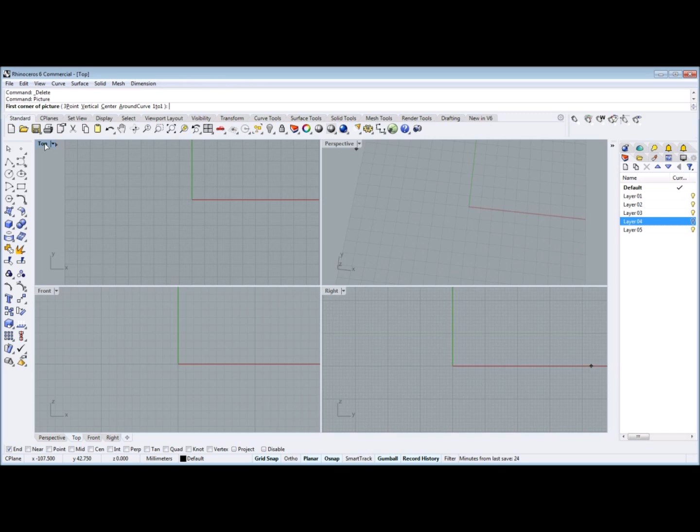Notice how we have crosshairs here, and I'm going to put it into the top view screen. We just drag it in and place the second corner by clicking on that corner. The scale really isn't important at this point, and you'll see why in a minute.

The next thing we will do is use a control point curve up here, the upper left, and I'm going to take off grid snap in this case to get more precise placement of my control points as I try and get as close as possible to the edge all the way around this gem, making control points anywhere between 2 and 3 millimeters, and 5 and 10 millimeters apart.

We can go around this pretty quickly. It's not imperative that we get it perfect at this point. We move around our gemstone, putting our control points a little closer as we get around sharper corners, and then we can move faster and place them farther away as we get onto more flat parts of the outline of the stone.

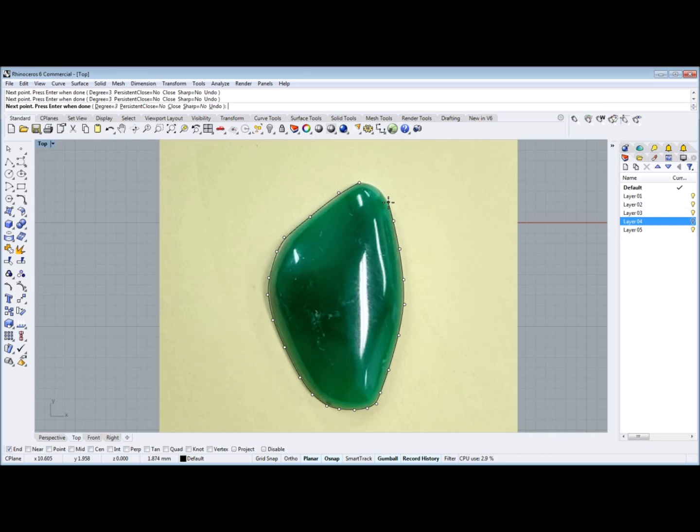I'm going to bring this in pretty close here to put these last couple of control points in. Boom. It's not imperative that they're perfect at this point, because as you can see now, as we highlight the curve, control points show up in Rhino 6, and we can begin manipulating these control points.

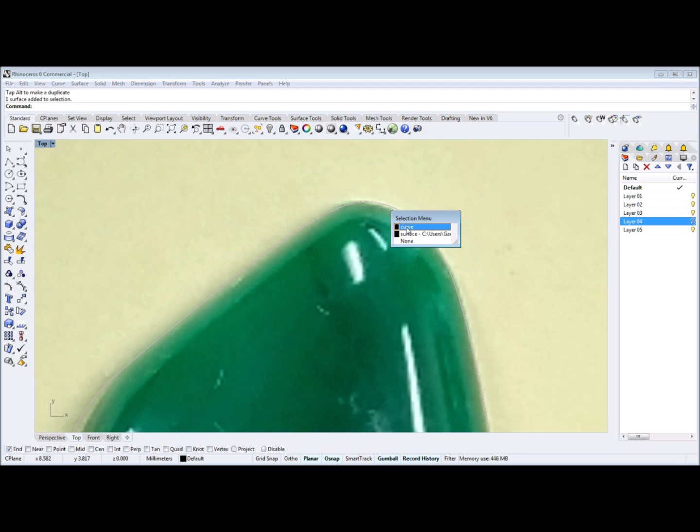We can use the arrows, the gumball handles to do that. We can use the center of the gumball, but we'll see here in a minute.

Let's find another one that needs some editing. Okay, curve over here. In this case, I'm going to shift select, which selects both of these control points, and I'm going to use the window pane.

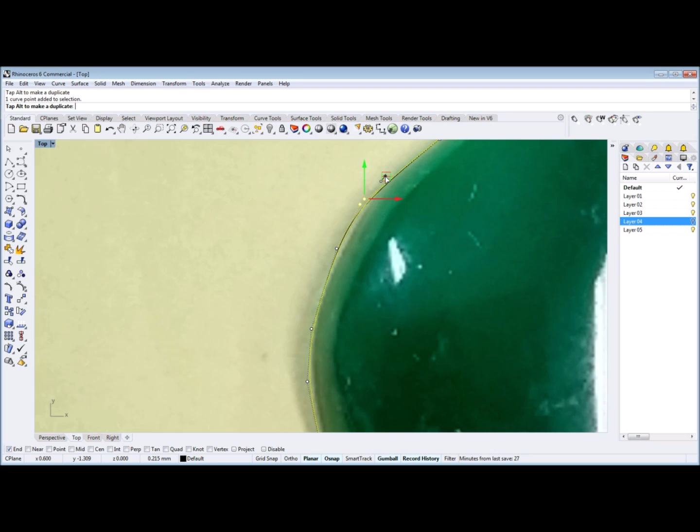Looks like I shouldn't have maybe selected both of them, because this one in particular needs a little different help. There we go. The window pane moves really freely around whatever viewport that you're in, and I find it really great for control point editing.

We're in pretty good shape here the rest of the way around this gem. I'm going to call that happy. So now we select our picture. It's a good idea, we may need this again, so we're going to save it.

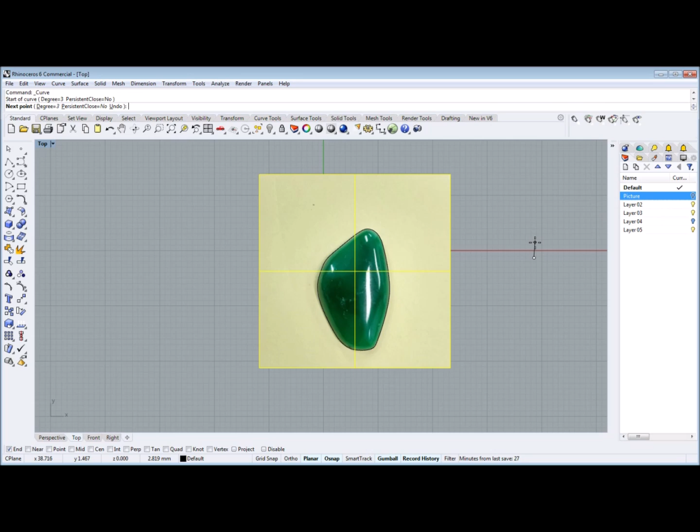We're going to create a layer, name it picture, and we'll put this on the picture layer, then hide that layer so we can bring it back later. Oops, what happened here? That should go on the picture layer. What just happened? There we go, got it hidden finally.

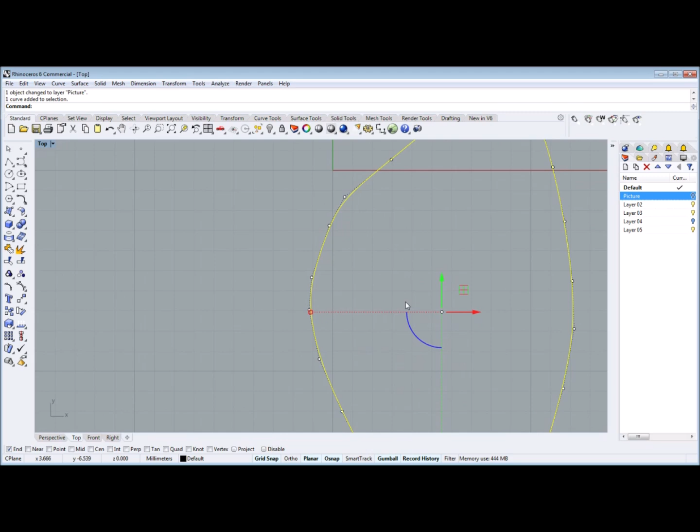Now, the next thing we're going to do is bring this to 0,0. We're going to center this as best we can by using gumball center with grid snap. We're going to come in a little closer here, and we're going to get this centered, then scale it from this central part of the viewport.

Now, I happen to know that the gel variscite is 24.07 millimeters from the very top to the very bottom of the stone along the y-axis as it sits in the top viewport. So I'm going to make myself a first reference line here.

Doesn't really matter where it is. I'm going to turn on ortho, so I definitely make a straight line. Type in 24.07.

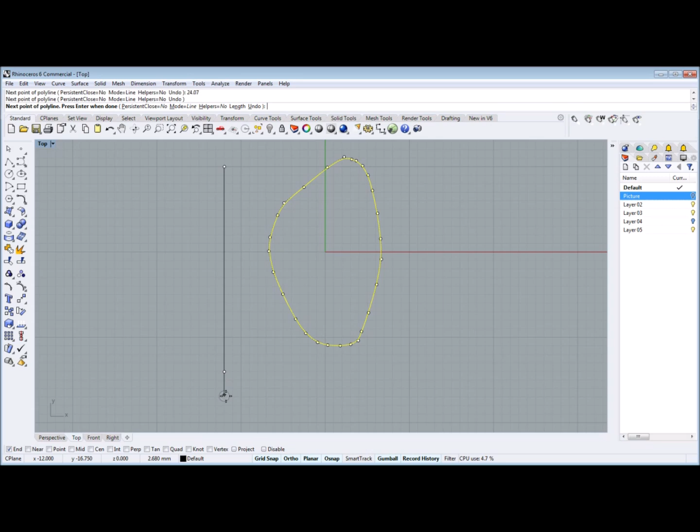And then I need to get this centered on the y-axis, or centered at 0 on the x-axis, on the y-axis. And I'm going to make additional reference points from the end with ortho on to let me know exactly where to put the top and the bottom of this gemstone.

And now I can transform, scale 2D from 0,0. I'm going to turn off ortho because I get a little more control that way, and I'm going to bring this out to exactly that point, so it just touches my reference points, my reference lines. And so now it's scaled properly.

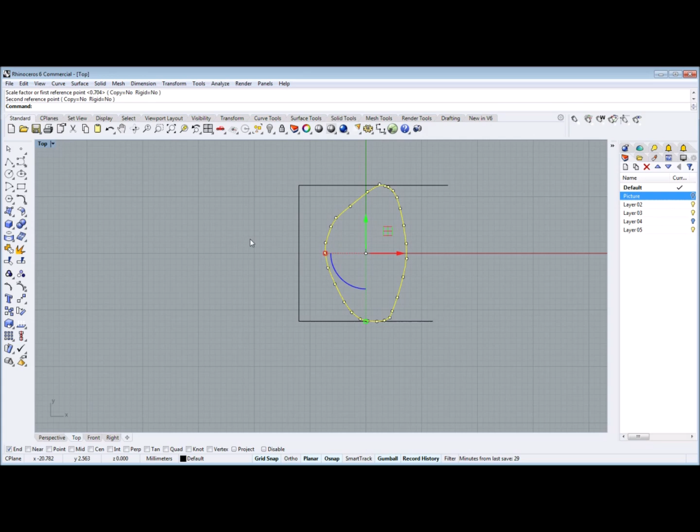All you need is one dimension to get the rest of the gemstone scaled, or the rest of the control point curve, the closed curve in this case, to scale the gemstone perfectly. All right, and now we can just delete these lines because I'm pretty sure we're not going to need them again. Now we're going to offset this curve both to the inside and outside.

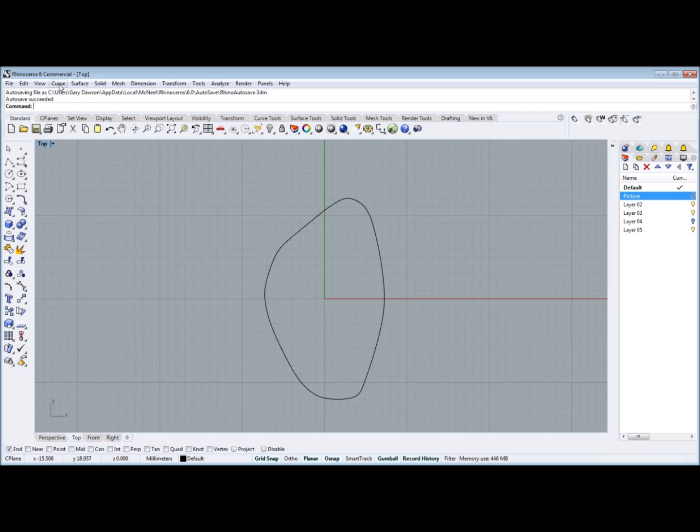So highlight the curve, offset curve. On the outside, we're going to go 0.5 millimeters, and that will be the thickness of my bezel. On the inside, we're going to go 1.5 millimeters, and this is going to be the open bezel I hope to create.

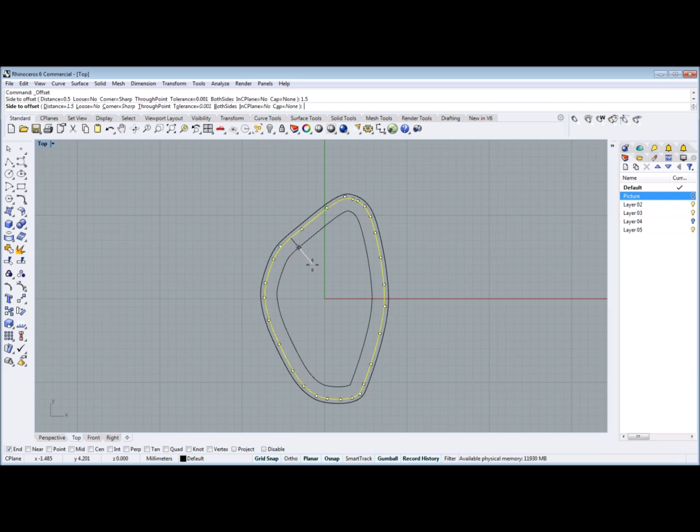We're going to select all those by dragging right to left. We're going to go to the front viewport and use a new feature in Rhino 6, Gumball Magic, to extrude those curves into a surface.

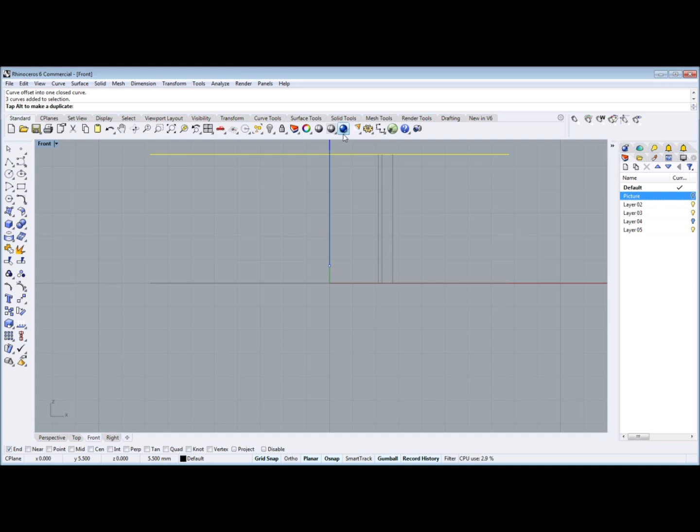Let's see, how far have I gone there? 5 millimeters is plenty good enough. Now I'm going to select all of those and cap them. And we can check this over here in the perspective viewport. See, now we have closed poly surfaces, 3 of them actually, stacked one within the other.

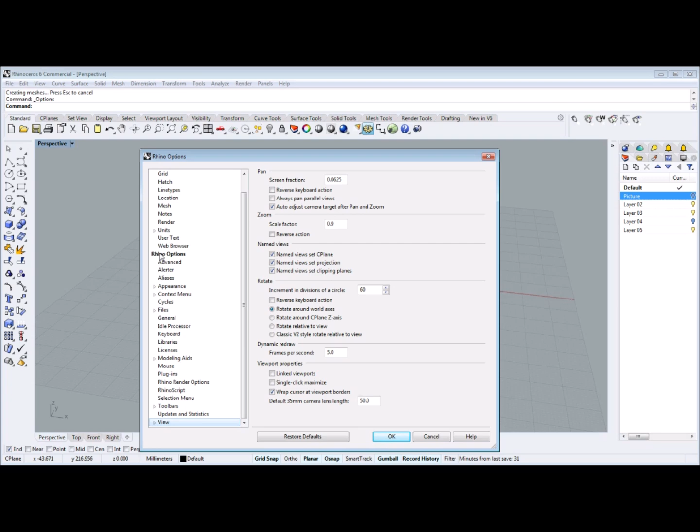I used an alias to do that, and I'm going to very briefly divert to aliases, which are available here in the little gear on a standard toolbar. The little gear brings up the Rhino options, and underneath the highlighted Rhino options, we have aliases. I will highly suggest that if you haven't looked at aliases already, you do that, because you can create keystroke combinations like macros that will rapidly or greatly increase your workflow if you commonly use a group of commands.

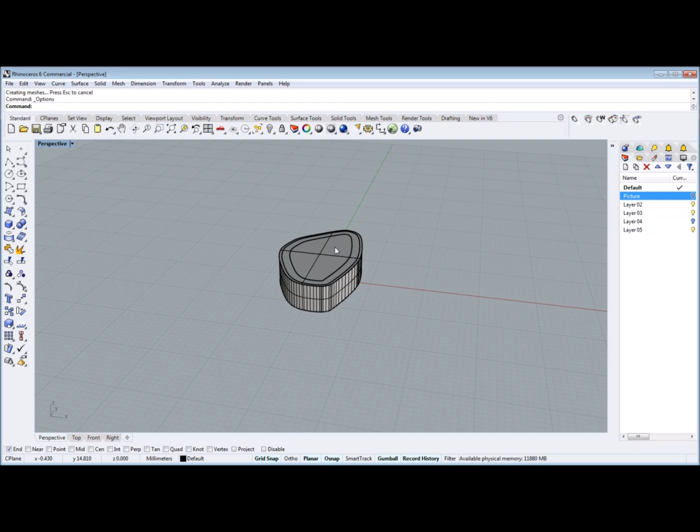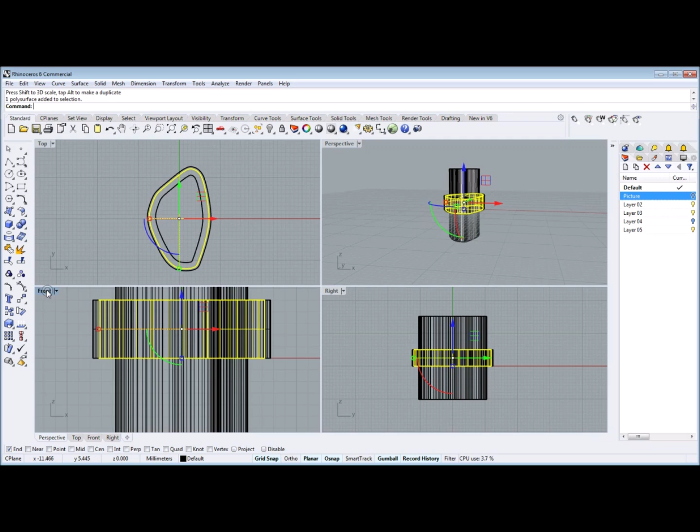All right, so to complete our bezel now, we're going to select the innermost poly surface. This is going to become a cutter that will give us our open bezel back. We're going to select the next poly surface, which is the one that was created from the original bezel curve, and we're going to move this up 1 millimeter.

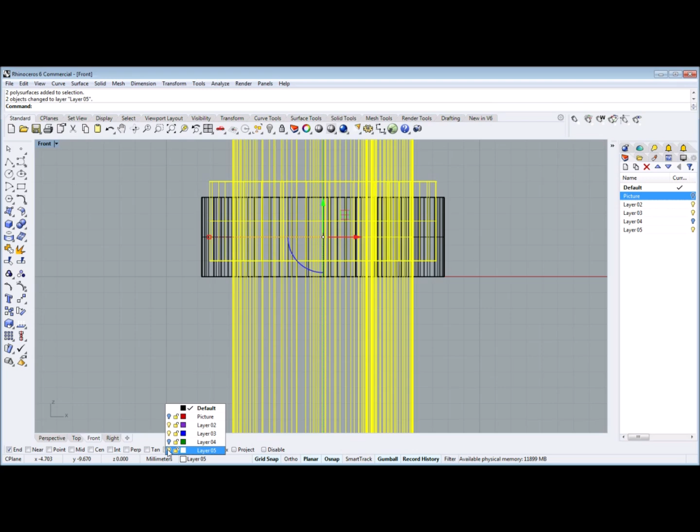Exactly. Now we do a simple Boolean difference, selecting the outermost polysurface to cut from. We're going to select the other 2 to cut with, and now we can select the cutters, and I like to move them to a different layer at this point and then hide them. And here we can see our completed bezel.